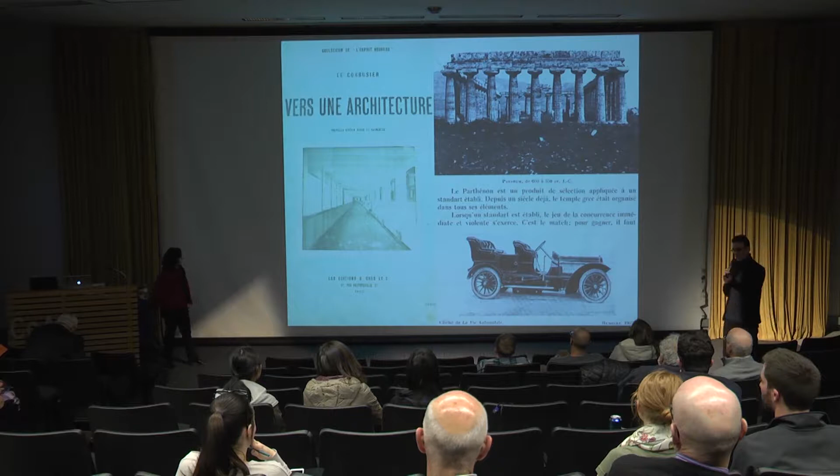Ideas that combine how history and contemporary issues can be connected, and how they can also be provocative for what's coming next. So not only ways of reading current developments, but also opening readings for different kinds of developments, or again, very profound ways of connecting ourselves to where we are. So how do we study architecture?

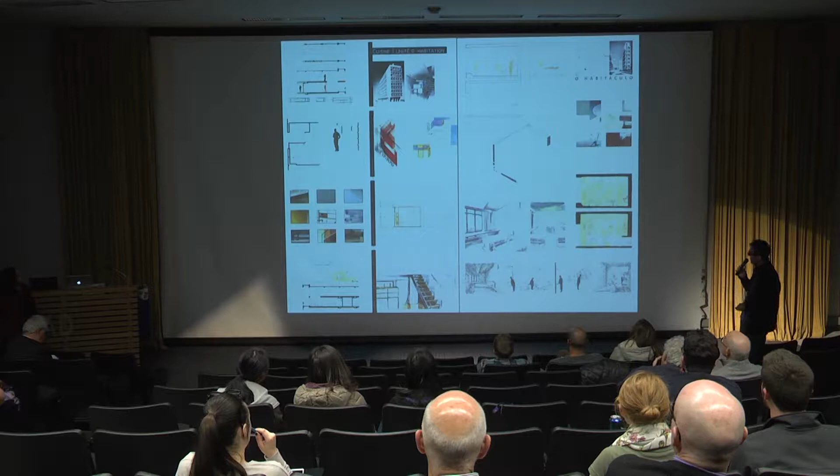But we also believe that architecture design cannot happen without research. So although I think there's too much light in these slides, this is a group of students looking at the kitchen at the Unité d'Habitation, and looking at the materials of the kitchen and how the kitchen is organized. And here is a group of students looking at the bedroom in the sanatorium by Aalto, and details like the height of that window that allows someone lying down in bed to look out towards the view.

So this idea that we have so much to learn from each other, that architecture is like a big family, and by researching someone else's work, we may have better shots at being more creative and more inventive. But I also know that the design process is never linear, and is something that we also have to reconcile with many different forces and almost unknown and open pathways. So we're also interested in taking our work in as open ways as possible.

So these are examples of one of the things that I, as a director of the school, am trying to push, which is students' record of their work through a portfolio where they are mapping the artists' or architects' work with their sketchbooks. And these are things they're looking at. This is from a comic book. As they are developing their projects, looking also at sculpture, and there's a notebook page with a bit of poetry as well. So this idea that, although we have a very precise disciplinary body, it's not an enclosed disciplinary way of working.

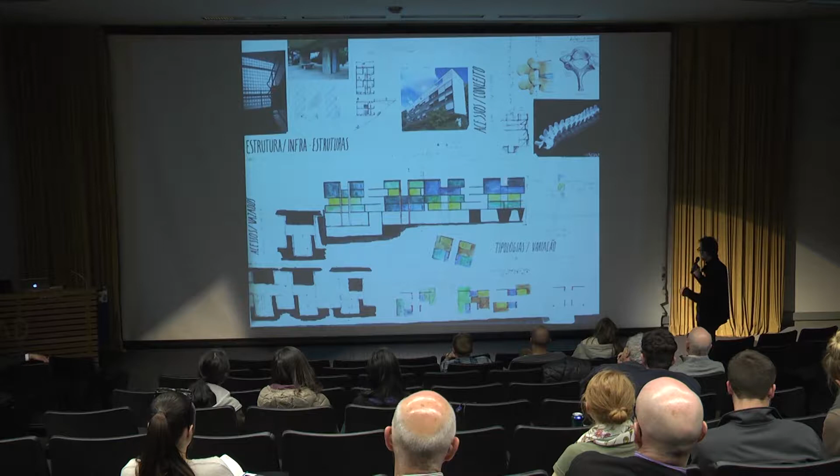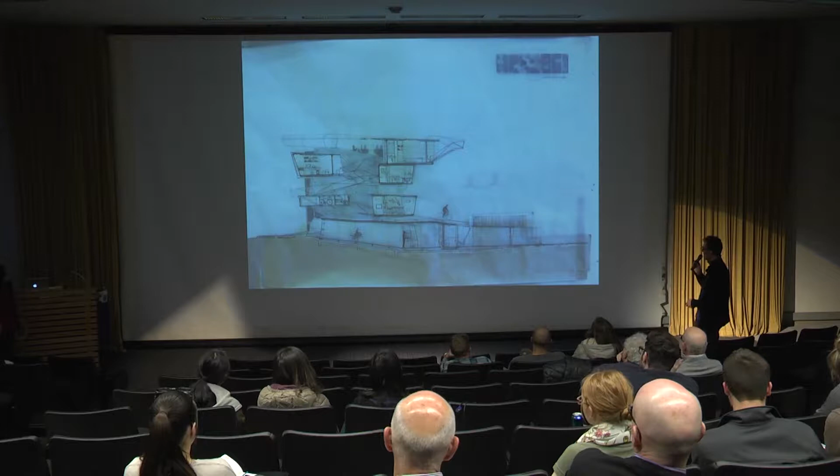And looking at structure, looking at bones, and understanding the different rhythms, and how in between every single disc there are soft tissues, elements that link us to how we experience certain programs in space. How do we study our bodies? I mean, the way the body inhabits space is almost the first fundamental thing we have to learn from. So these are examples of first-year students where we're trying to understand how buildings are not only organized, but how they are inhabited.

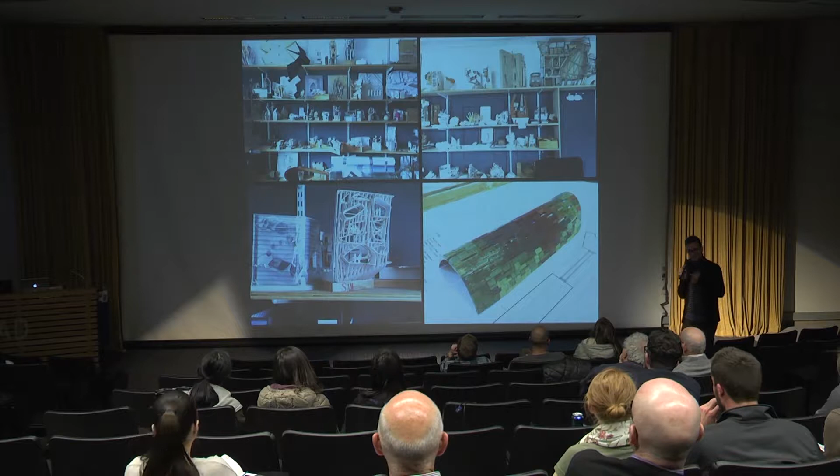Buildings are part of our everyday lives. And what we do is also achieved or searched through a series of continuous errors. And by having this mode of work where we learn from our mistakes, we're trying to make mistakes again and again, which is one of the important ways for us to salvage work.

So Christina will continue. Can you hear me, or do I need the other microphone? Can you hear me? Okay. Oh, you've been recording, so you can hear from here.

Okay, so just to give you a little bit of understanding of where our office is.

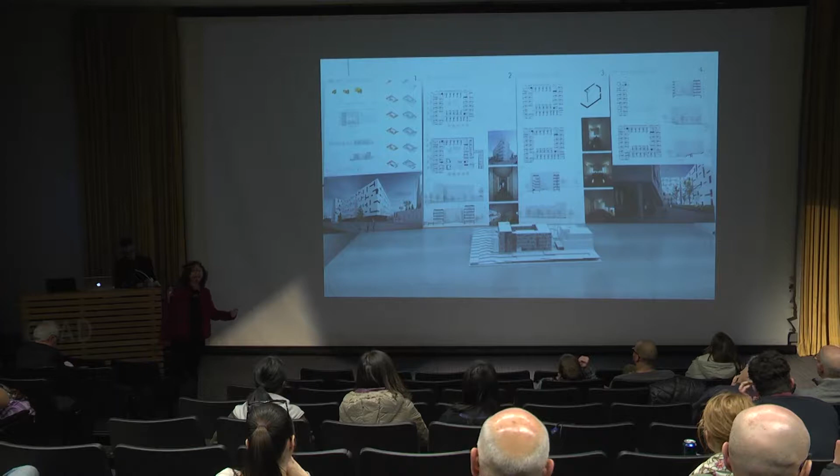And then we do a lot of competitions. As you know, in Europe, most of the buildings which are public buildings come through competition. So actually the buildings we're going to show you were, most of them, competitions that we won. But this is an example of how you submit your work to people that should not know your name. So in this case, we submitted 4 panels with images, diagrams, and a model. And this is how they selected our work, and we got a first award. So we're going to build this in the future.

Okay, so pass to Diogo now. Okay. Turn this on. It's on.

No, it's on now. So an interesting thing that we've also learned about architecture is that, almost as John Cage once mentioned, there are 10 rules for students and architects and professors. And the last comment he made about the 10th rule is to break all the rules. But one of the things we've mainly thought about is that in architecture, whenever there's a valid point of view, its opposite can be quite valid as well.

So this is a series of themes that we've found and then embedded in our work, but they are not aligned in any particular way. Those are things that either are bugging us, structuring us, messing us up. But those are just the way we've kind of written them. Those are things that we are always looking at.

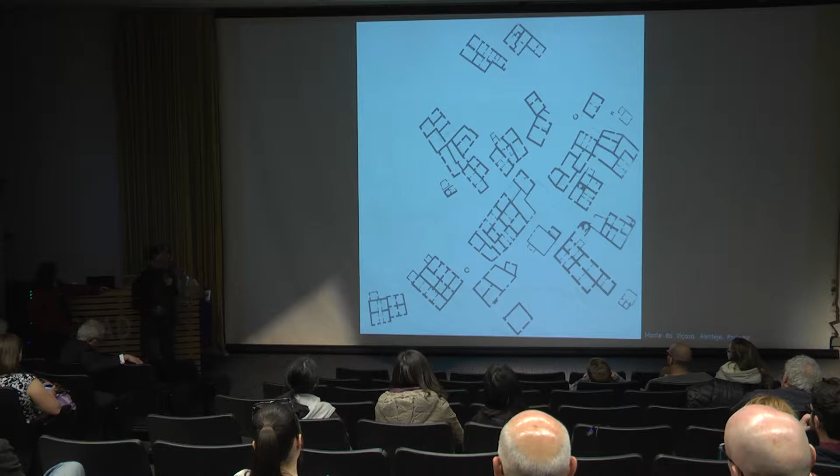And so this series of images just talks about how, from a diagrammatic point of view, we are interested in buildings that are opened up to the landscape. This is a little village in the middle of Portugal, and here what we can see is that the public spaces are, as the rooms are so small, the squares become living rooms in the city. So a square is a room for people to gather.

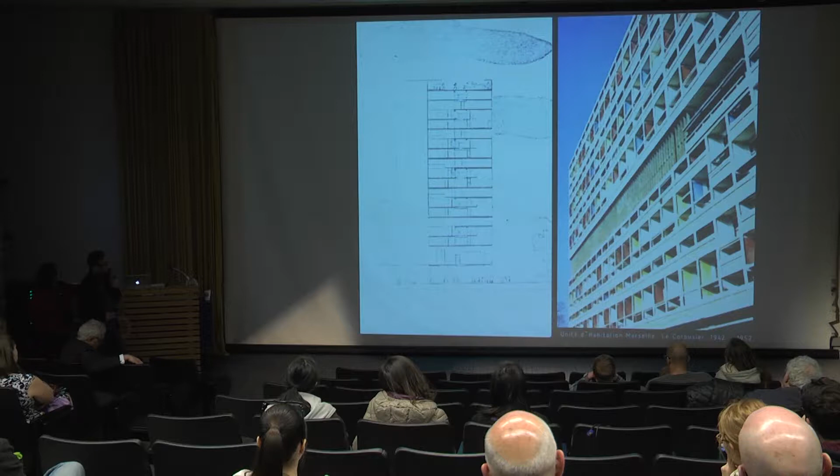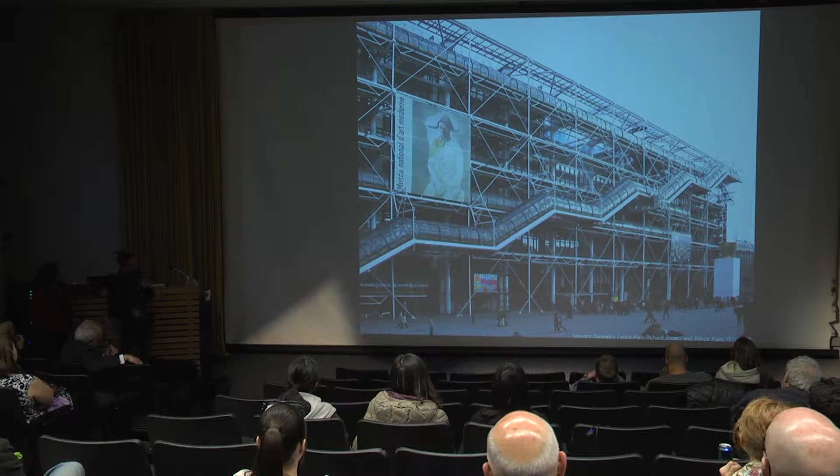But we're also interested in how we question the ground floor, how buildings establish a kind of ground condition, and how in this case there's this notion of the displacement of the ground condition by providing public space in different locations in a given building. And in this case, the fact that we circulate along the facade in front of the square here binds together the program, the circulation flow of people in the building, and it's the urbanity of this very strange building that was built in 1977.

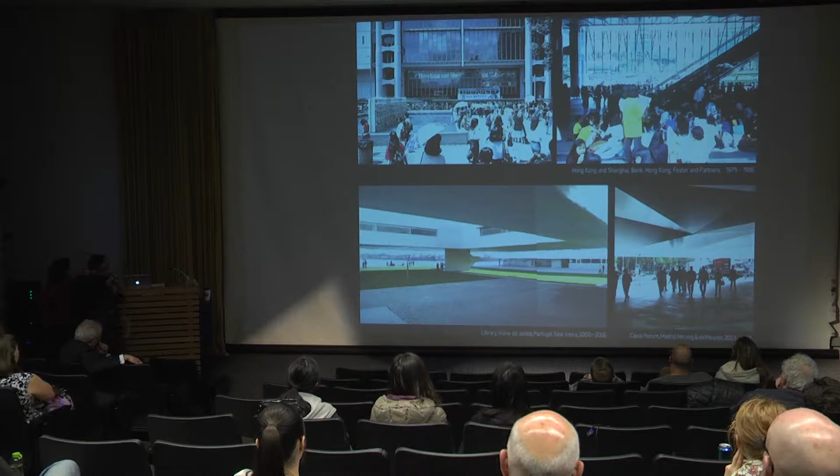So examples like how the ground is considered: here in the Hong Kong and Shanghai Bank Corporation's headquarters in Hong Kong, what's very interesting is there's almost no program on the ground floor, only the escalators. And knowing how expensive land is in Hong Kong, it's quite remarkable that this ground floor is occupiable by anyone at any time to do almost anything. And this is a Caixa Forum by Herzog & de Meuron, this is a library by Siza, but this idea of how the body flows from the city to the building is quite important in our work.

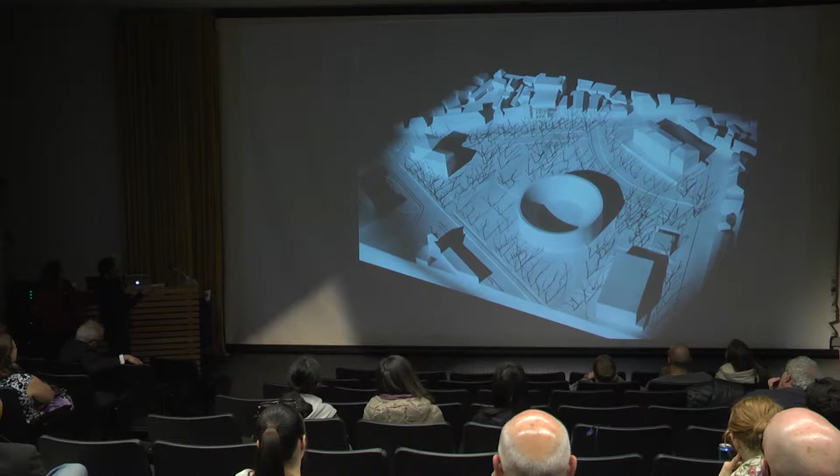So one of the key questions in this building immediately for us was, how do we provide for a building that is quite public, that is aligned in the street, that has quite small buildings, that is facing a very large public space. So there's a sense of dichotomy between the scale of the building, the scale of the program, the scale of its neighbors, and the scale of the space that is going to be signified by its program. That's the bullfight ring, the post office, the market, the town hall, and the court there.

Hasn't given up, has it?

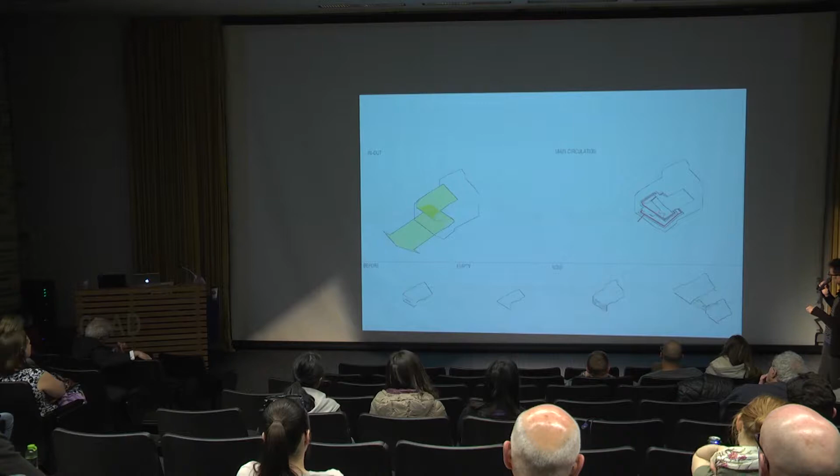The lot is very limited. It has, I have to say this in meters, 20 by 40. That's approximately 70 feet by 140 feet, and through these diagrams, you can't see much here, but one can see this idea of opening up the building towards the street and planning circulation along the facade. And I'm going to move to the program, the circulations.

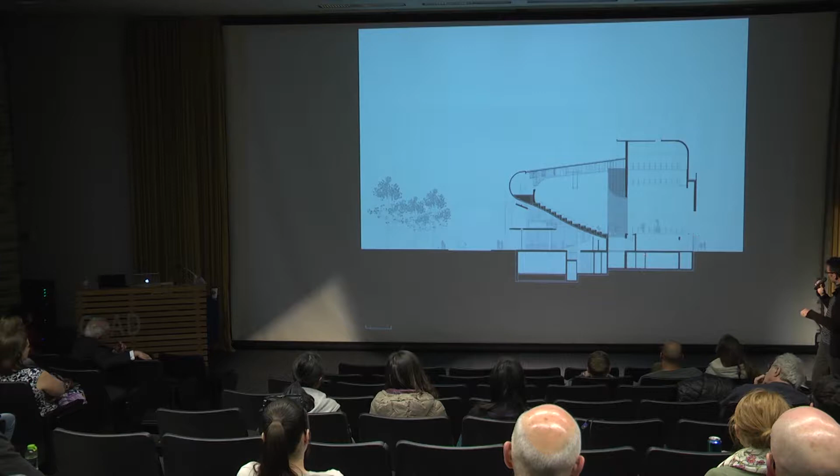And this is what I wanted to show you, which is how the street connects to the lobby, how the main auditorium is lifted up, the small auditorium at the bottom, the stage, the space on the stage. This is changing rooms. You can see that most of the height of the building is taken by the stage tower, and that's mainly what one can see in the plans now.

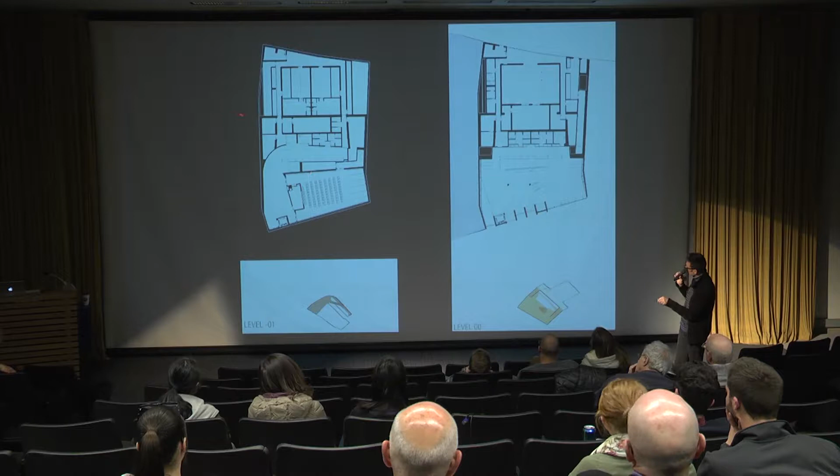So this is the ground floor. As you can see, it's as wide as possible, as deep as possible. Those are the stairs that take you to the upper level, to the main auditorium, and those are the stairs that take you down to the small auditorium. And you can see here, those are very big legs. I'll explain this in a minute.

From a structural point of view, the building is cantilevered from this point. So from this point, on the left-hand side, as you can see here, this is something like 70 feet cantilevered. This is maybe 80 feet cantilevered there. And so to do this, one can see how the structure is very much fixed at these two thick walls here, and with the help of those two guys over there.

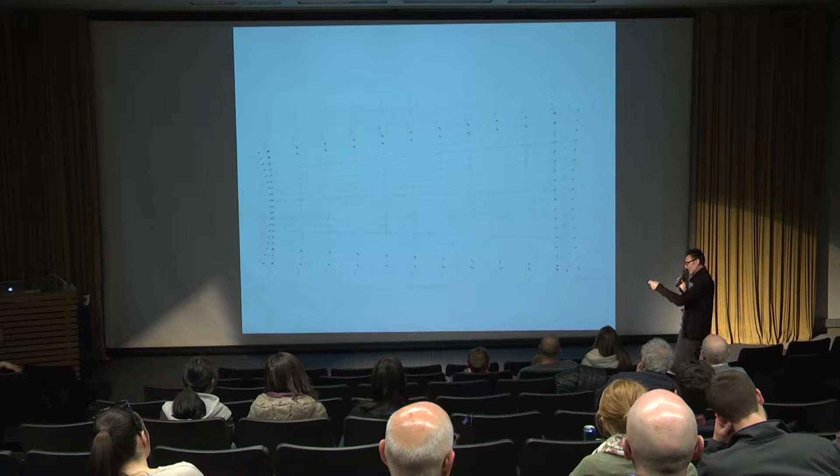And this is a drawing that maps all the circles. And this is not CATIA or anything. This is like AutoCAD 11, but we had to use those files and send them to the formwork fabricator that fabricated all the formwork through those files that had to be very precise in terms of its geometry. Because of the shape and the cantilever, the concrete is all self-compacting concrete, i.e. it's a very liquid concrete that doesn't need to be vibrated.

And what it means is that if there's any joint between any piece of formwork that is not completely sealed, water will go through, and if water goes through, there's sand concentration and less water concentration there, and it's a mess. So this was highly studied, welded together as one piece. This is 18 tons. I do not know how to translate 18,000 kilos into pounds, but it was heavy. A little bit.

And because it's pulled by a crane, there's this guy with a string. If he pulls a little bit, this thing will go like that. So it's like walking the dog. And this single piece of formwork had to be taken out as one single piece in one go. So this is one of these days on site that we'll find our spiritual guides and try to pray as much as possible.

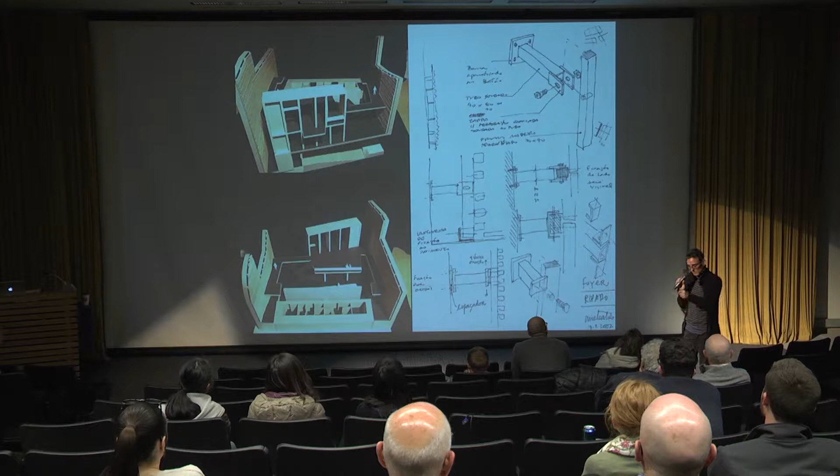And we were committed to do something that you and I could unbolt and get access to any duct if we needed to. So the idea here is that material will provide for this sense of continuity. So we had slate on the floors, concrete on the ceilings and on these walls here, and the pine wood on the lateral walls. So the public space was all done with natural materials.

And here I am about 12 feet under the ground floor. Those are people walking along the street. So by playing with voids in and out of the building, it also allows someone who's in the street to take a peek into the building, as the kids we just saw did.

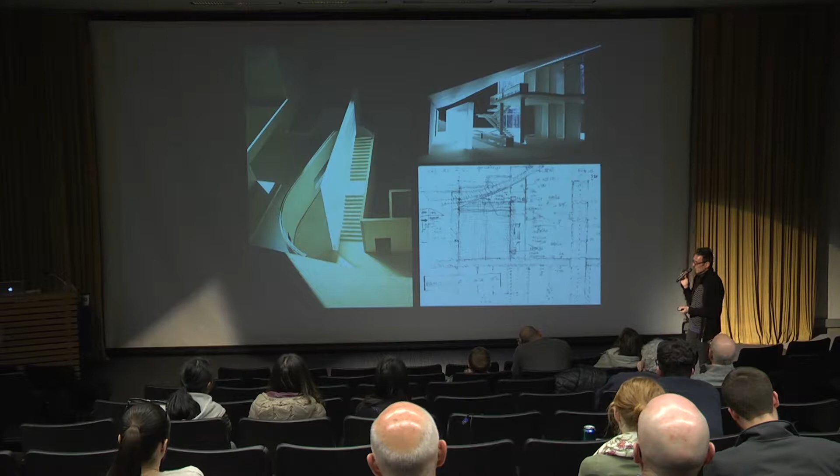As we didn't want to have any lighting here, a big question was how are we going to provide enough lighting in this space? So we provided this big light box that was tested. This is me a few years younger. Here is how we're testing how many lighting fixtures we need—cheap lighting fixtures, but how many would we need? Two, one? And here is three.

This testing happened even as we were designing, in the middle of our design, working with the electrical engineer. We had no idea how many lighting fixtures we were going to need. We were interested in continuous lighting, and we were lucky to have a glass manufacturer and an electrical fixture supplier who, after a series of meetings, were kind enough to provide a little experiment so we could learn what it takes to produce this. In public buildings, if these things aren't measured or specified, you're going to get into trouble later if the performance of the building doesn't comply with your client requirements.

So here you can see the introduction of color right at the moment where we move from the public space to the cloakroom, the cafeteria, or the restrooms.

At the back, all the walls of the stage are yellow, and the floor here is a cheap red rubber. Our intention was that even at the back of the stage, this big window could open the backstage to the street so people could walk by, and we could have images of the different shows occupying this wall over time. But it's also the entry to the lower stage—yes, the entry to the backstage, it's a service area.

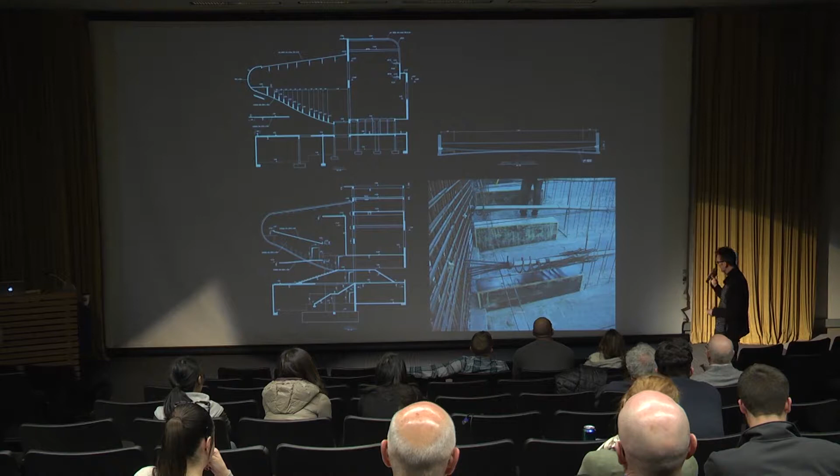And then when they got built, this is post-tension cables, as you can see here, and you can see those boxes—they seem to be built just with leftovers of formwork from other jobs. So it's interesting to see something that is apparently quite complicated but built in a kind of very clumsy way. And this is what we were aiming at.

You also can see that although the theater is quite classic in its shape, there's no threshold, there's no proscenium per se, although there's wing space at the stage, which is one of the most fundamental features in any theater, which is how we provide for privacy to performers.

And this is what moves us, how then the building is occupied, lived, enjoyed, and how the joy that we've had through the process comes alive in the way the building is being used.

So those are different shots of the stage, but also how creative people intervene with great audacity in the public areas of the building. So this is a fashion design show, performing in the staircases, participating in a poetry reading, photograph exhibitions, and a jazz festival.

And recently, the manager of the building, this is just an image being projected against the concrete wall, found out that the basement, the low ground floor, is very good for hard rock stuff. So apparently new heavy metal, loud music is being experimented in the lower ground floor.

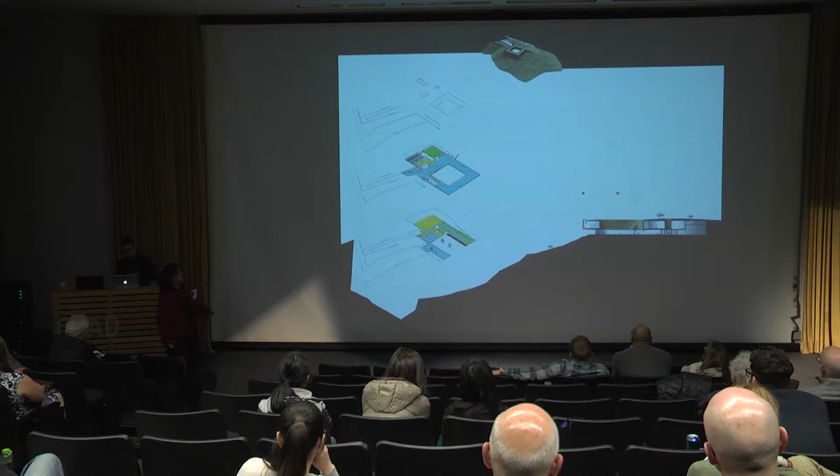And so the building is really coming from the earth, so it's part of the earth, and what it does is create a room, which is an outside room, a sort of cloister that in a way organized this museum that has this quality of framing the view.

So we were very interested in this huge landscape to select one point and just give a window to people to overlook, and at the same time to be protected from the winds and the warmth -- it's very hot in there, so we had this water feature running.

We had all this glass that connects one side of the museum to the other, and then this wall that embraces people and frames them into the view. So we create a public space, this public realm where people would like to be.

So that is the museum, and how does it fit within the landscape? In this case, of course, the walls are attached to the ground, but the building is like a wall floating above glass, so it has this metaphoric kind of intervention.

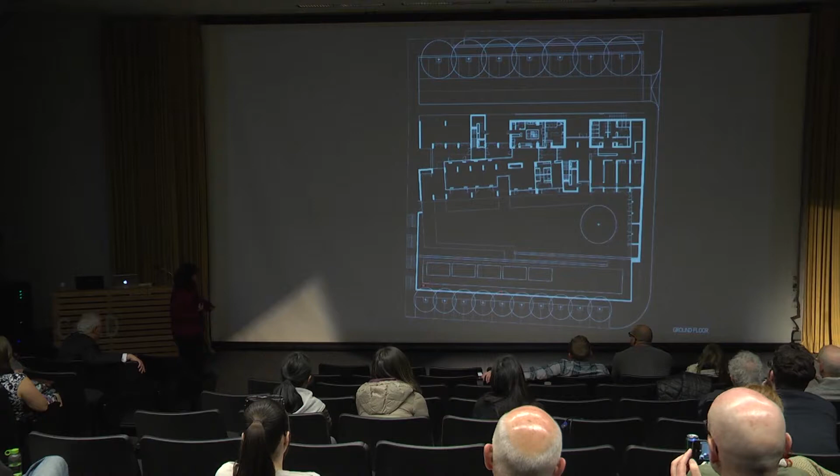So this is the garden, where they have a lot of events. The building creates an arcade so they have some shade when it's very hot, and you have transparent areas that connect the upper levels with the ground.

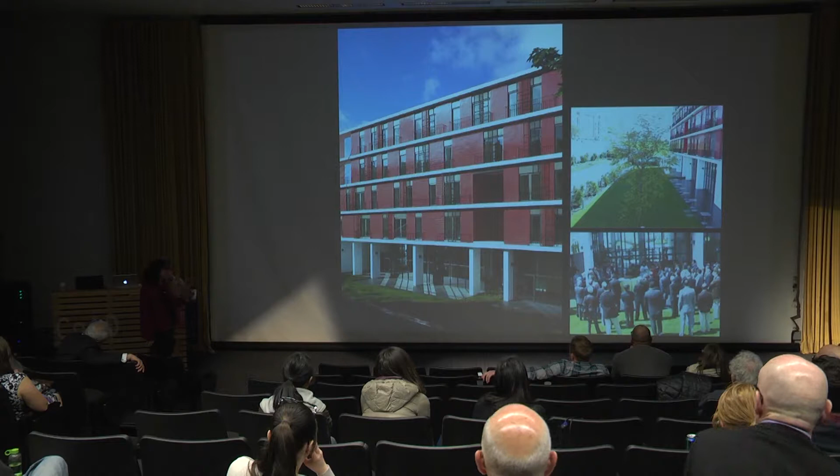For this building we selected tile, a material that is very commonly used in Portugal, but at the same time has almost zero maintenance because it lasts for a long time, especially under our climate conditions.

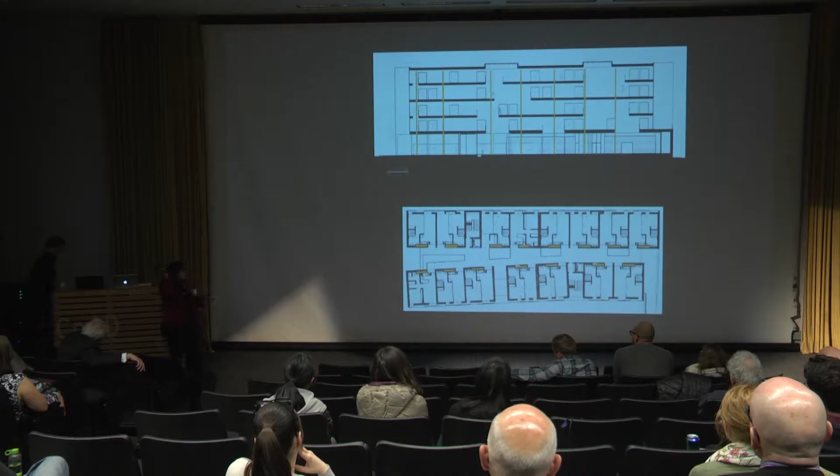So these are the vertical shafts that organize the infrastructures, and each floor is different. Because this is low-income housing, we only play a little with the corridors, but the infrastructures, which are the most expensive part, are always located in the same place.

This allowed the facade to be totally different, but at the same time it allows diversity, because these are older people, so they would recognize each floor as different from the others, helping them recognize their own floor.

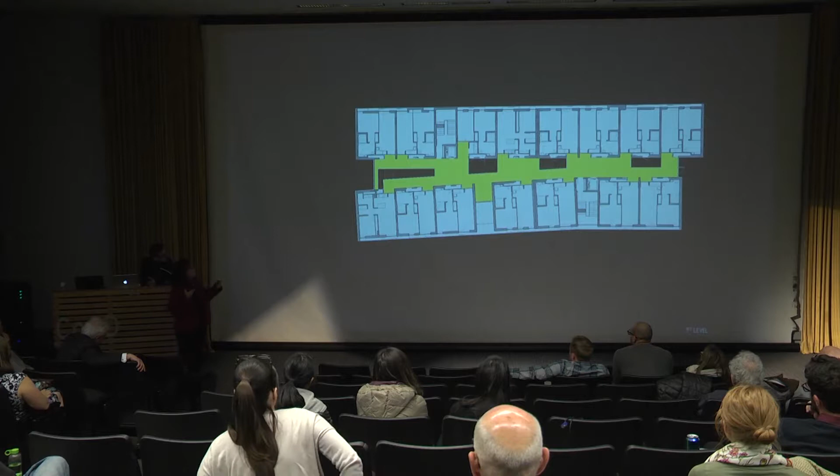This is an idea of one floor. The green space is the circulation area. It allows them to have pockets where they can talk to each other, and at the same time the voids connect all the floors, so they can be talking from different levels.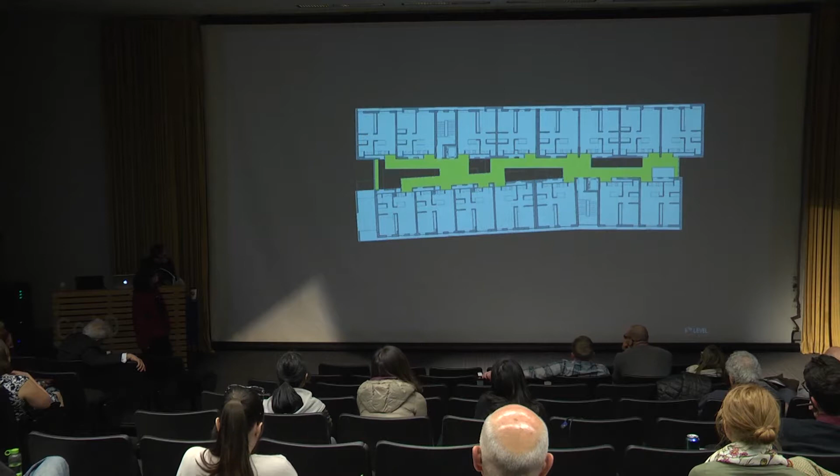If you frame on this unit, you can see how the door goes differently on each floor, and how the voids differ because of that. The infrastructures are kept constant, but everything flips from one floor to the other.

This is a section through that space showing the double heights that happen on each floor. We always wanted them to be talking at different levels, and these are what we call the winter gardens, where people with less mobility could overlook the garden and even talk to others.

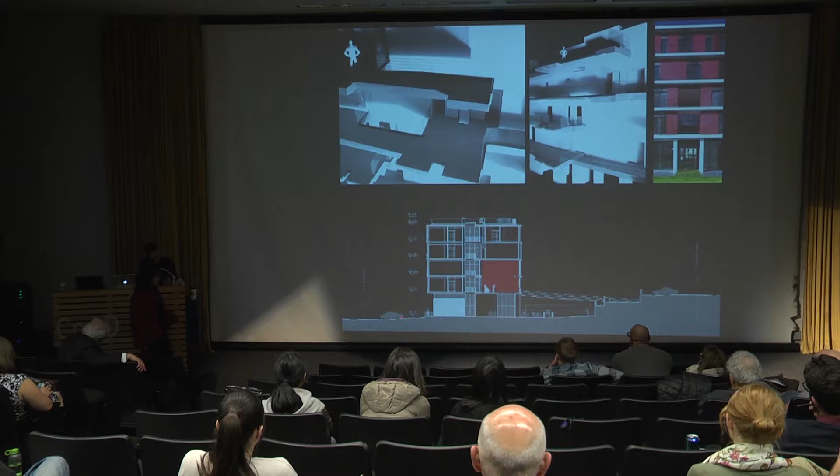This image shows the continued transparency engaging with the garden, organized on different levels. This sense of place is achieved using the topography, how the walls embrace the garden and connect it to different levels.

These are images of the units. On the ground floor we also used slate. This material is leftover from the quarries, which we bought in large quantities, and artisans came and assembled it. So what you see here, even though it's stone, is a very cheap material. Portugal doesn't have a lot of natural resources, so we have to use what is possible.

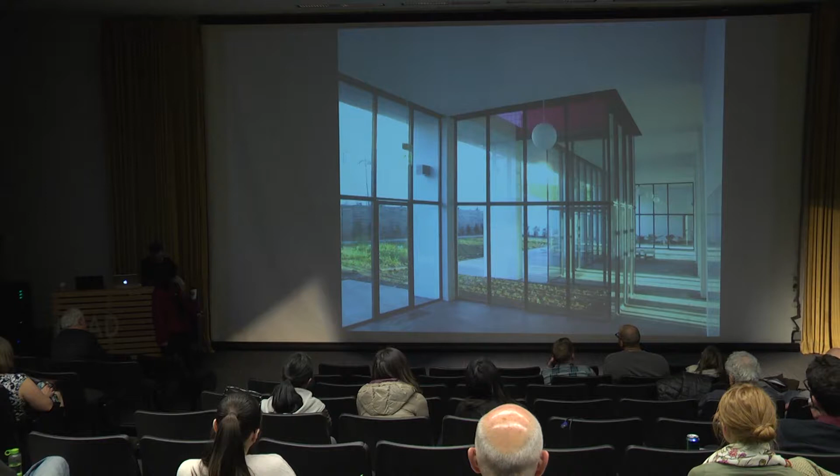And color became for us a material, because for us it is a cheap material. So we use a lot of color as a contrast between surfaces. The connection with the garden sometimes gets inside. This is the living room where they share. This is them. This picture doesn't show well, but this is the garden, so they are always connected there.

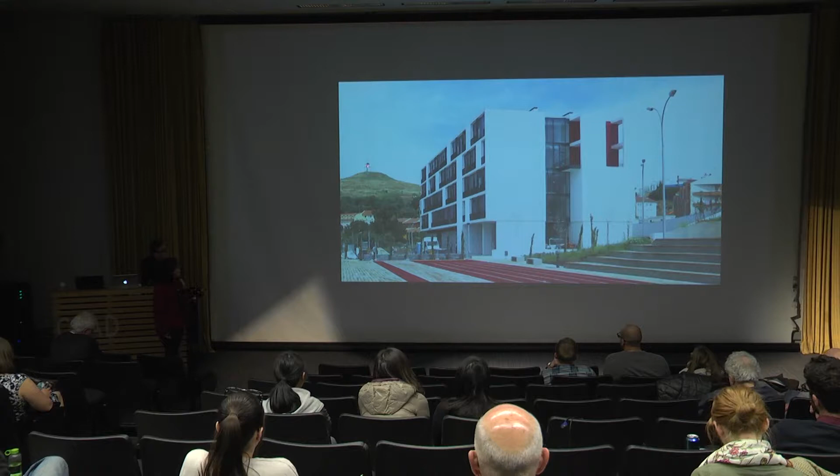And this is the view from the other facade, which is the main facade, where on this side we use the blue. So we also have the contrast between the very cold colors facing the warmer facades and the other side, which is the red. And in the middle are these circulation spaces, organized again with the site and this geodesic mark.

Another house: we decided to show you a house in the same place where our theater is. A client decided to give us this commission, and he had a plot really close to the theater, and he really enjoyed the theater, so he wanted us to design the house. Now, the reason why we wanted to show you this is because the topic is again public realm, but this community is a very small community, and they keep the doors open.

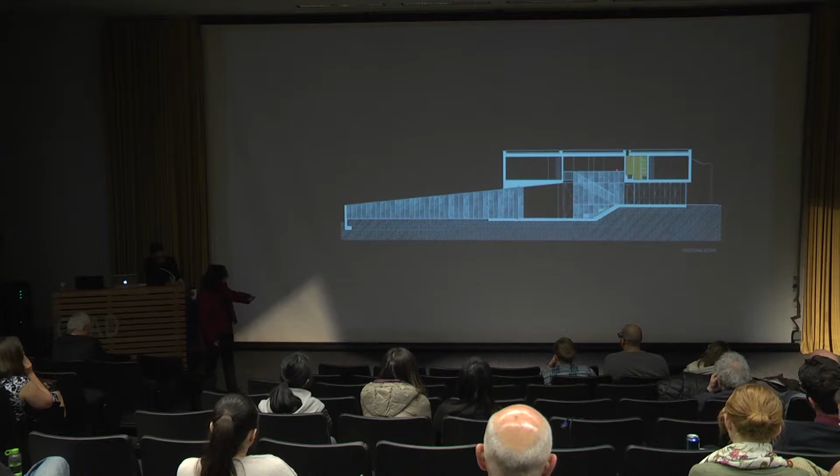So we were thinking about how a house can get privacy when the main door is totally open to the outside. So this is the street, and this is the main entrance, which they can keep open, but there is this connection with the garden. Again, we play with topography, and we have this very strong volume, which is heavier, attached to the ground, and then the private spaces of the house are like a box that floats on top of this heavier volume. This heavy volume interacts with the ground, so that's why we sculpted the ground in order to organize the levels. There is a staircase that brings people up and down.

And so what you see here again is that through the use of the slate, we organize one floor that has a courtyard. Now in this climate, the courtyard is essential because it filters the light. And in this case, because the topography is different, the courtyard also organizes different levels. And it gives you this sense of freshness that you need within the warm parts of the day.

Oh gosh, it doesn't show.

But this is a view from the entry, and where that person is, is the garden. So you create a connection through the garden, but the privacy is kept, because even if the door is open, you will not be seen, only when you're going up and down the staircase, but mainly the house is organized without being seen. So we like to show how people use the house. So this is how they use the house.

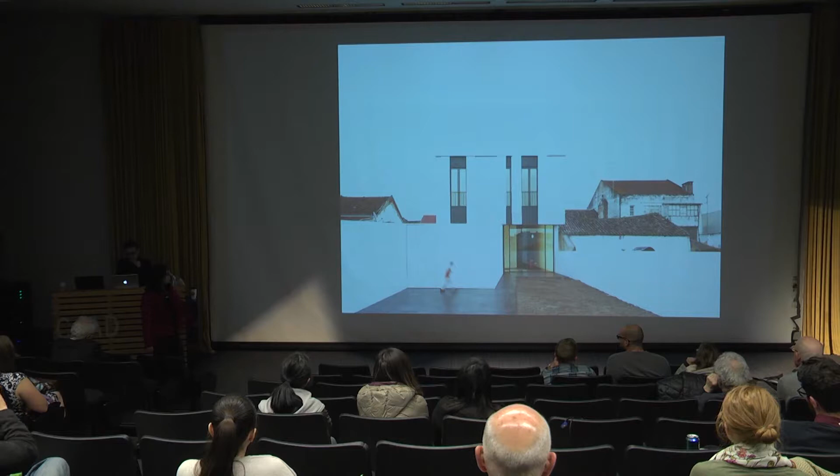There is a very big room at the back, which he calls the music room, because he loves music. So the house is a very peculiar one, because he has a music studio in his house. This is the garden, not yet; now it has more gardens and everything.

Okay, this is me? Okay.

Okay, so another interesting thing is how we select buildings that already exist, because it's not just building, it's how do you keep on having buildings that have been used forever, and how do you give them a new life? So in this case, this is a town in Alentejo where on a main square there was a monastery that was already a military headquarters, that was a hospital. So it's a building that has been through many stages, and the town is beautiful, with a castle, with these walls.

The town is mainly white with the red roofs. So we were interested in keeping these types of traditions and conditions. This town is very famous for its tapestry. And this is an event where the town is totally transformed, because they put all the tapestries on the windows and they celebrate the event. And our building is right on the main square, which is this building over here.

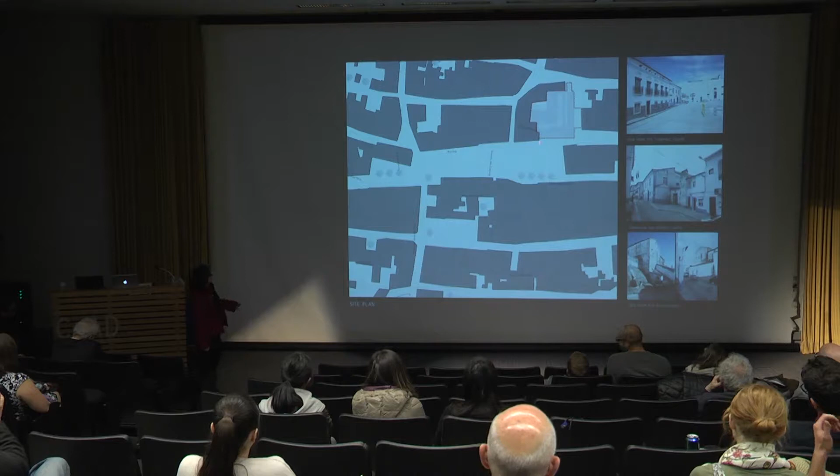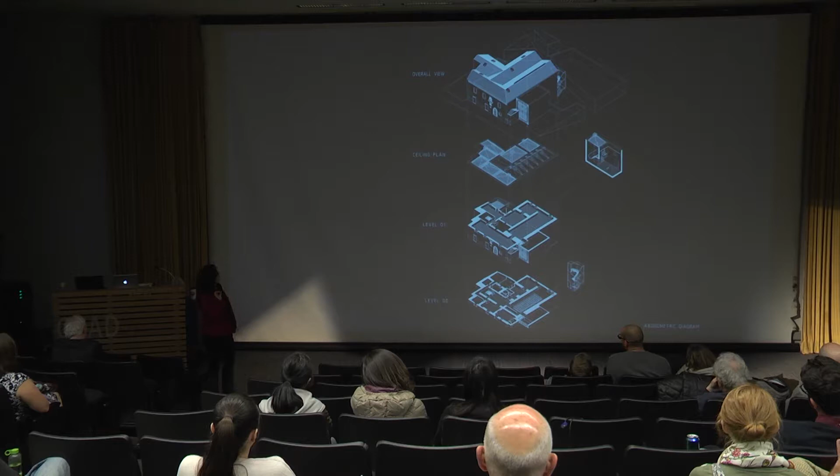So the building had a lot of uses, and what we decided was how we can engage in part of this building's life by touching very little. So in this case, turning it into a museum where people go in and celebrate their culture, we decided to organize one main area that became double height, where people get together.

The entry, this is the square entry. This was an old chapel that we kept, and this was used for many different things, but it was a large room, so we wanted to keep that as an exhibition room.

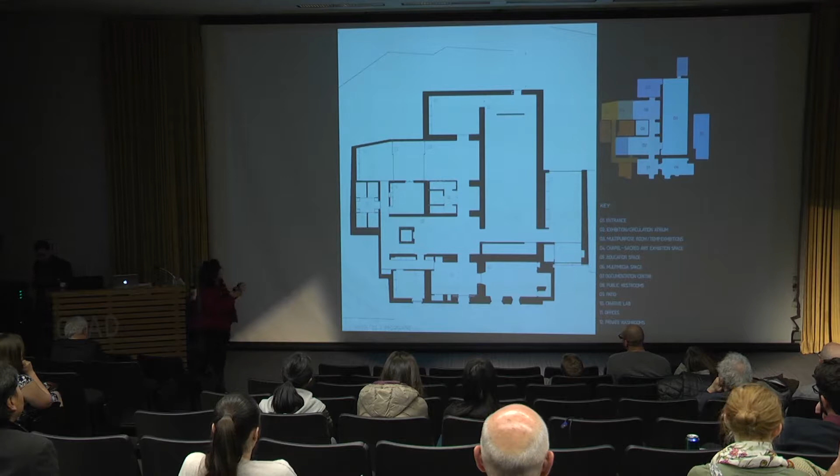We also create an extra part, so that is an extension of the building that before was just a courtyard, and this is our new intervention, let's say. So the building is organized through all these already existing walls that somehow we try to organize, especially because the levels were totally different. But we decided that our intervention would be creating on the ground floor this very heavy material, which is a local marble that will bring a new identity to the building.

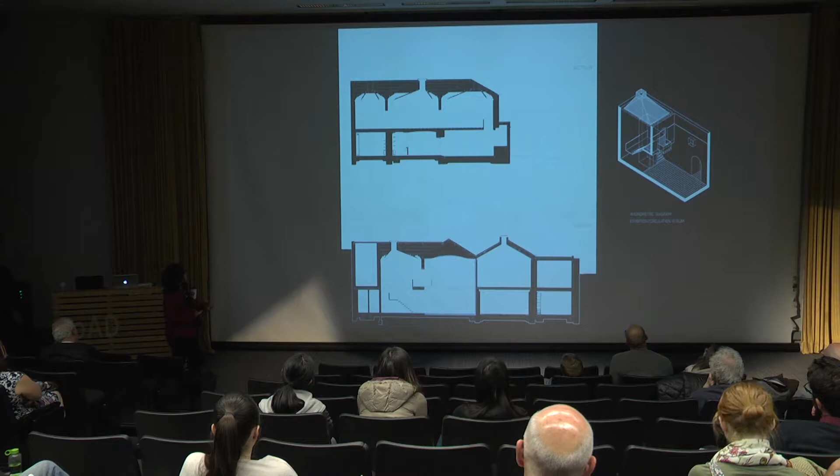Now, another feature which is important was the ceilings. So in the new life of the building, it was all about the floor with the marble, and then the ceilings that organize all these infrastructures, but at the same time create a lot of skylights that allow the building, again, to have a lot of flexibility. When you don't want to use them, they will be closed to protect the artifacts, but if there is an event, you would open them and allow people to stay longer, such as these women that stayed there the full day, and because we added these skylights, they managed to work there the full day with natural light. So again, how do we allow the space to be more flexible?

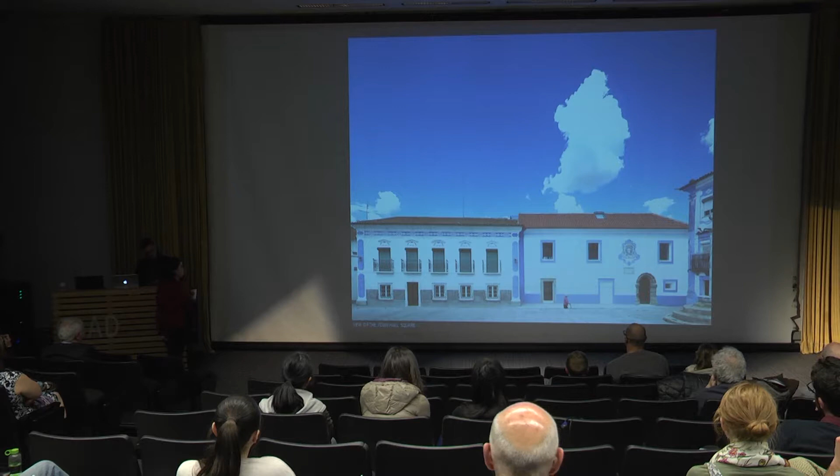This window overlooking the castle is a balcony that we open, and we allow people to go closer. The building was kept with our consultants in terms of color. We reached the original color of the building. And this is our intervention where, of course, we use the patterns of the tapestry with a CNC cutting machine.

Okay, this is me or you? Okay, me.

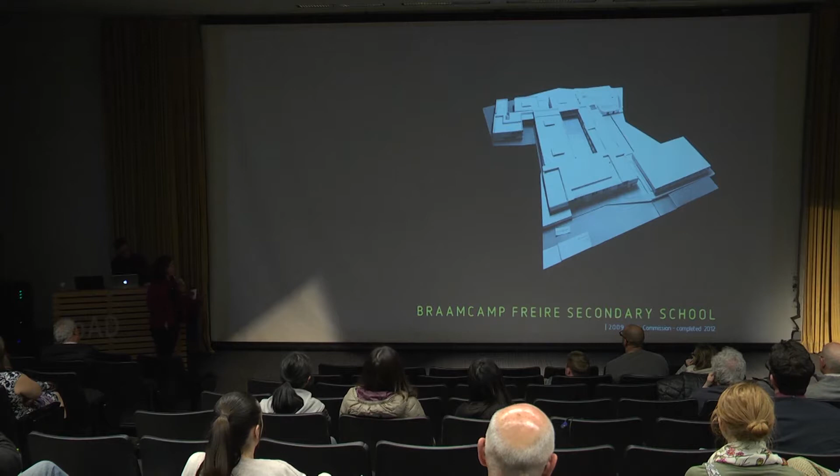Okay, so this is the school. This is the school that we finished from another competition commission, and to start this, we were very interested in what it is about designing a school. What are the things that children could be interested in? So we did a lot of research into these mathematical toys with geometry that Friedrich Froebel developed, which we know a lot of architects were sensitive to. And we understand that children are sensitive to proportions. So it took us a long time to organize.

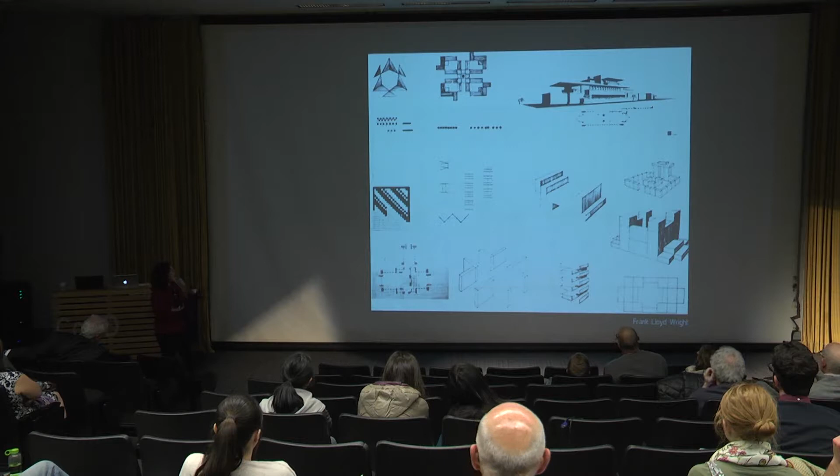These are architects that even say, like Frank Lloyd Wright, I played with these toys and they changed my life. I became an architect through these mathematical toys. So we looked at this and we realized that maybe this idea of playground could be interesting. So it took us a long time to organize what is a classroom, what is a good classroom. So they gave us this chance to do a school where there were already pre-existing buildings.

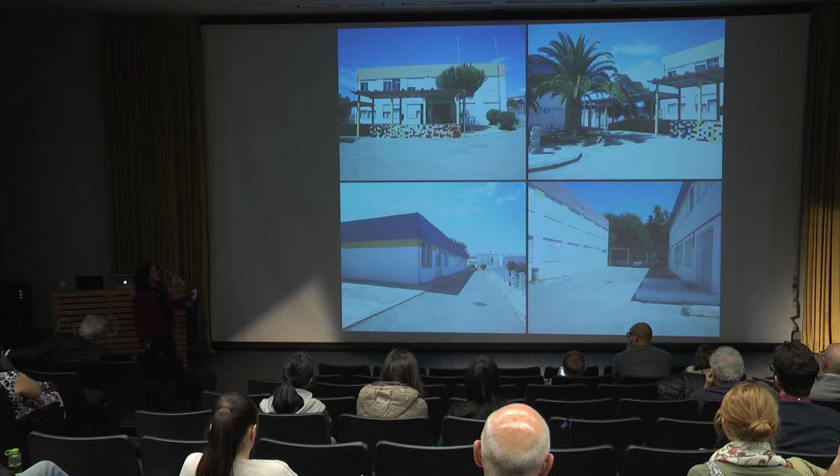So the school was organized into separated buildings, and through the paths they would go from one building to the other. Now, in terms of conditions, this was not in a very good state in terms of structure, but at the same time the children would get totally wet, and in wintertime it was very tough for them to stay outdoors because there were no indoor spaces for them to gather.

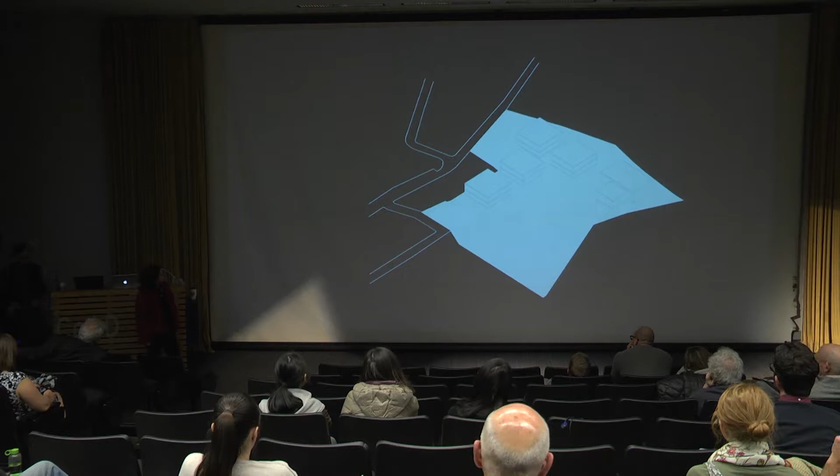So the idea of the school: first of all, this blue part is our site, and these were the existing buildings. So we decided to remove some of the buildings, and others we kept, and we organized the new program, which was twice or three times as big as the original one, but this time we decided to create one building that could embrace the existing ones, connecting all of them, and turn them into one single building.

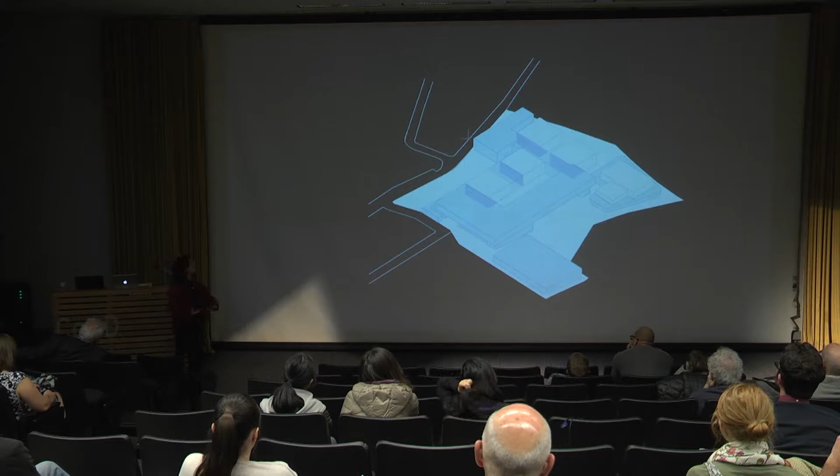In the middle, we create a square. And the square, we call it the learning square, is where all the students gather. So the school is part of a matrix that organizes all the site, and it creates areas where the buildings engage with the landscape, because there is a moment where there was a retaining wall. And so the existing buildings mold the landscape a little bit and create pockets where the children can be, and connect the old with the new.

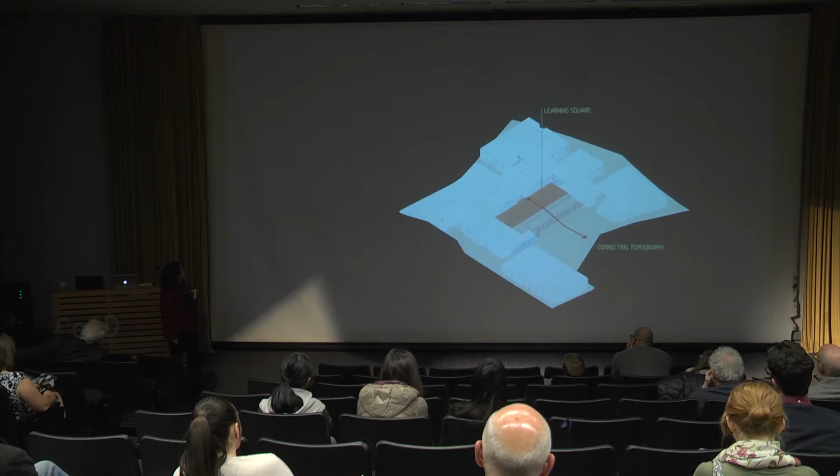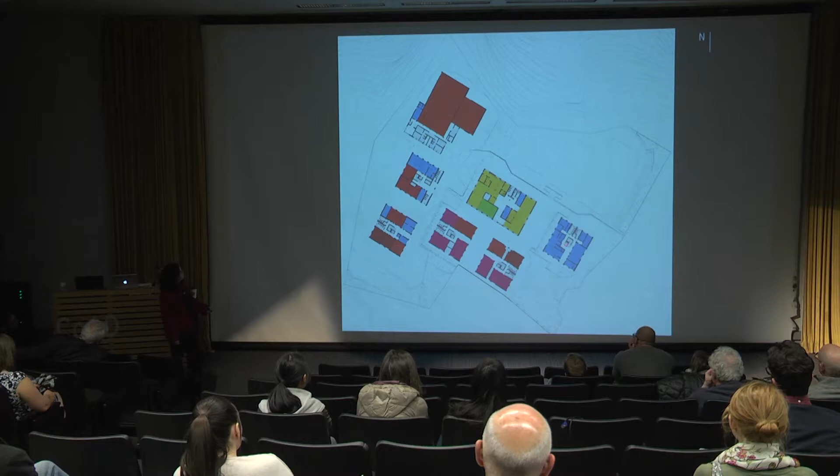So the learning square, the learning street, I'm going to show you after. And so this is where the learning square is, the circulations around that area, the connection with the landscape and the topography. And the buildings initially were totally separated, and this is how we start to connect them.

So in terms of this, this section is not very good. But anyway, this is a section through there. And what you see is the old buildings start to merge into the new building, and they create spaces. The other ones are a very regular grid, but then there are spaces that are twisted, they have a different shape, and those are the spaces that, in terms of sections, create unusual spaces where they gather.

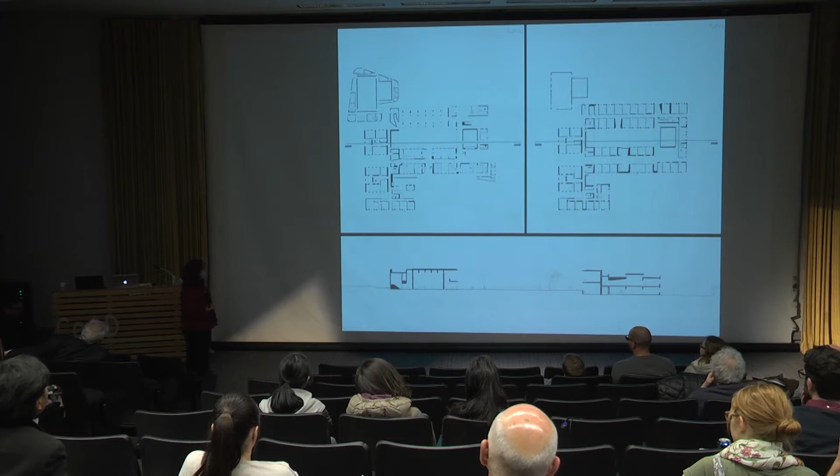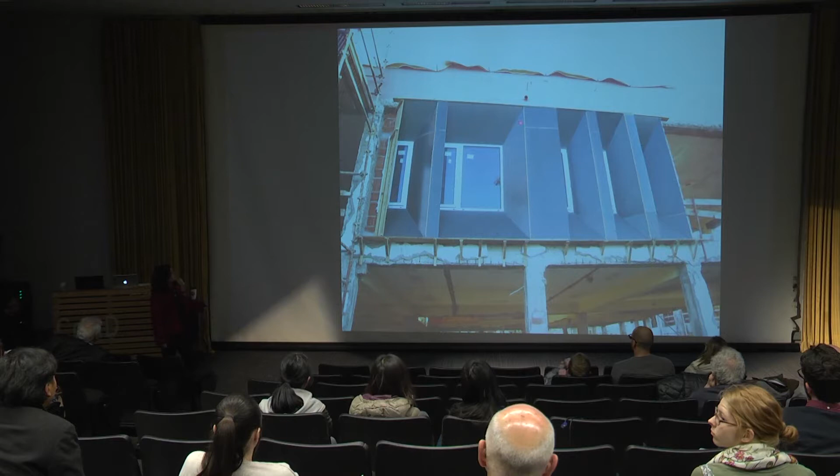So we're going through every floor and explaining to you the connection with the buildings. This is the existing buildings. And these are the facades. Now, in terms of facades, we create a mold that was a prefabricated concrete. And the way we designed it allows the light to be shaded, to be protected.

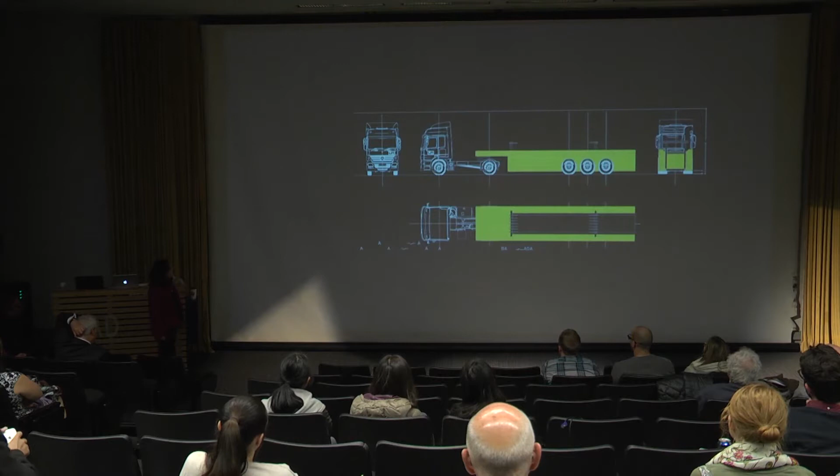Again, we use the color as an indirect light, so the students don't see the color, but they can see the color reflected. And this is how we studied the prefabricated panels so that they could fit into the transport that brings them from the factory to the site. These are some examples, and how they are assembled.

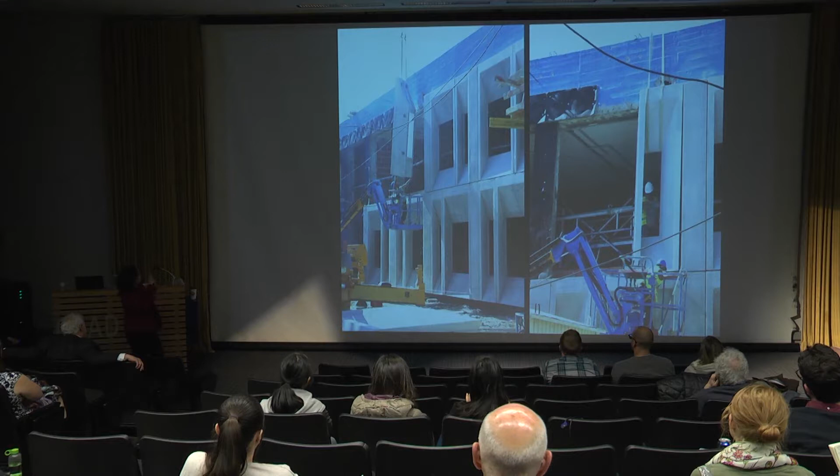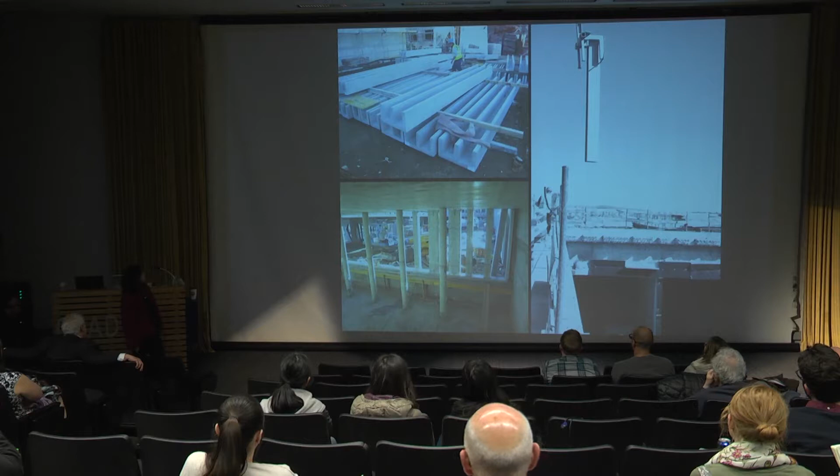So these panels are just 7 different panels, and they all assemble in different rhythms, allowing the classrooms to have natural light, but at the same time, the sun-protected light that it requires. This is the main square, which is a construction site at this moment in the picture. These are other prefabricated panels. This exists in the factory as a drainage gutter, and so we use them as a facade element.

These are examples to remind us that a simple glass needs 7 men to put it together. So we were very concerned about the weight of things, where we had to use the cranes and not. So you see the color applied, and you can have situations where you don't see color. This is what we call the main square, and the other side has a lot of color.

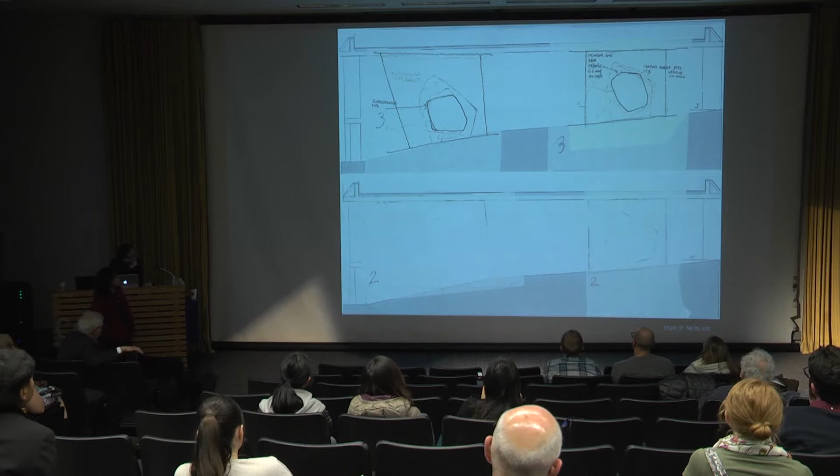So this is the connection with the landscape, and we had a portico. So the building is lifted from the ground, and it has the portico. So here is the indirect color that you don't see, but of course is reflected. And this is the arcade that we saw already in some of the images. So these are the studies for that arcade. We always wanted them to be a playground, so we studied them in order for the children to be able to see it.

So this is under construction with concrete. The shapes are getting there. So this is already one example when it's built, and this is the one that is facing the sports area where they play sports, and that is what we call a square. And this is them engaging.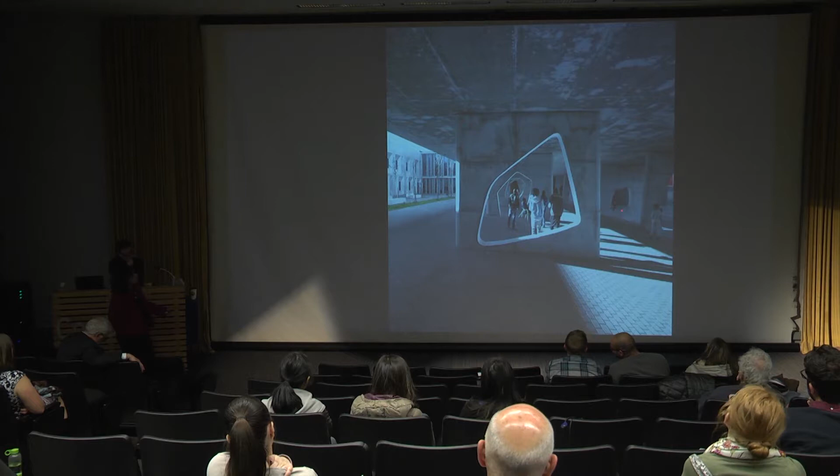This is the first day of the school opening. We didn't say anything, and they started to use this area as a gathering area. These spaces are very comfortable. Some of them you can walk through, some other ones you sit. So it's a very lovely space to be.

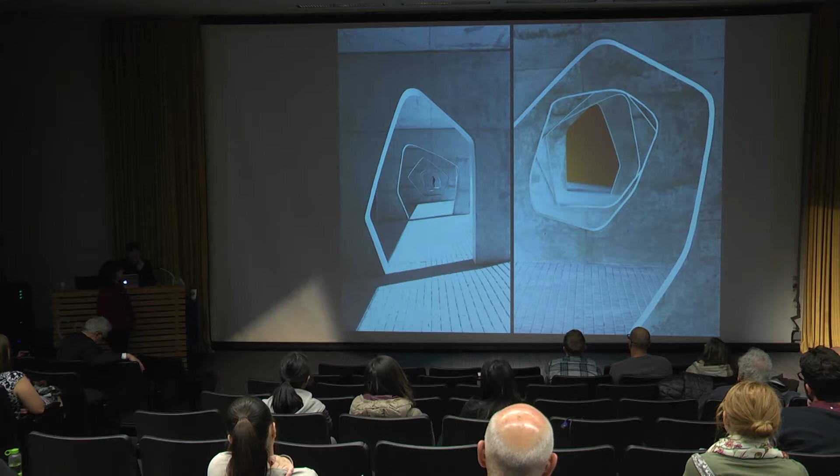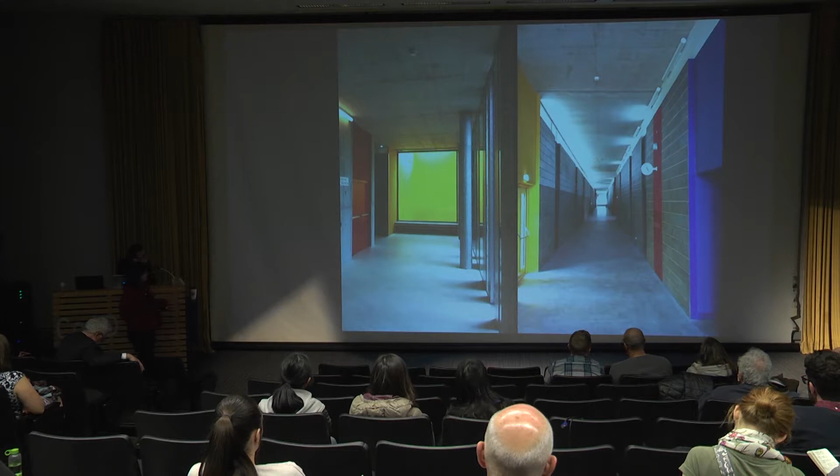And again, the color, we use it as a material. And so these are the circulation areas, which we embrace with a lot of color. Those are the regular spaces that I told you about. Some of them have light from above. Some others create a corridor that allows you to understand where your classroom is, in a different color.

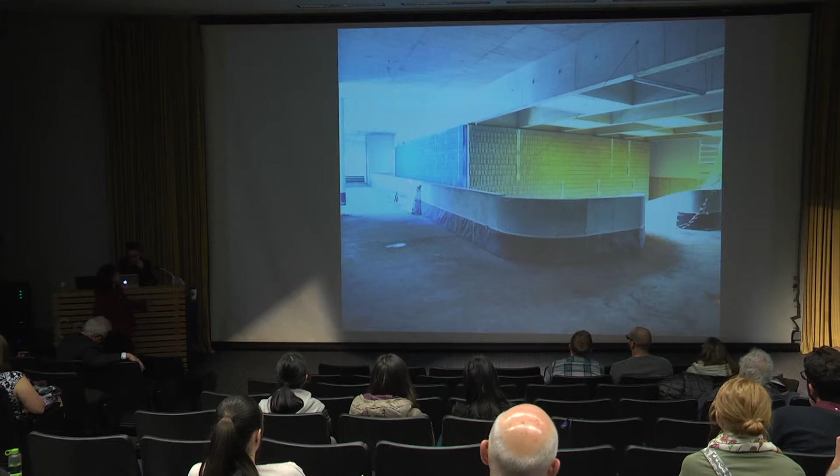Okay. So this is the main entry, and we have the use of color in this. This is a multi-purpose hall, where we designed this curved staircase, all designed in concrete, and these are studies for that staircase that we wanted to be a singular element within the school. This is the staircase getting built.

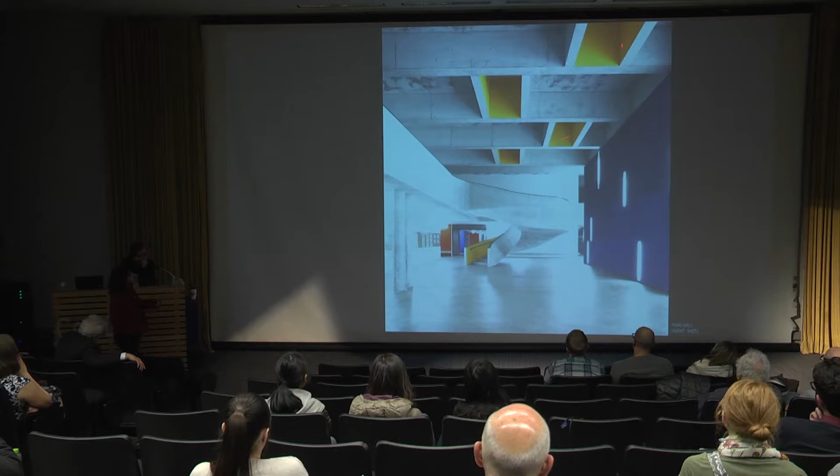And this is the space. So the staircase connects levels, and that is the multi-purpose hall. And these are the skylights that cast light at different times of the day, where you have the yellow that brings light to the space. The students use it a lot. This is the interior of that auditorium. And this is a classroom.

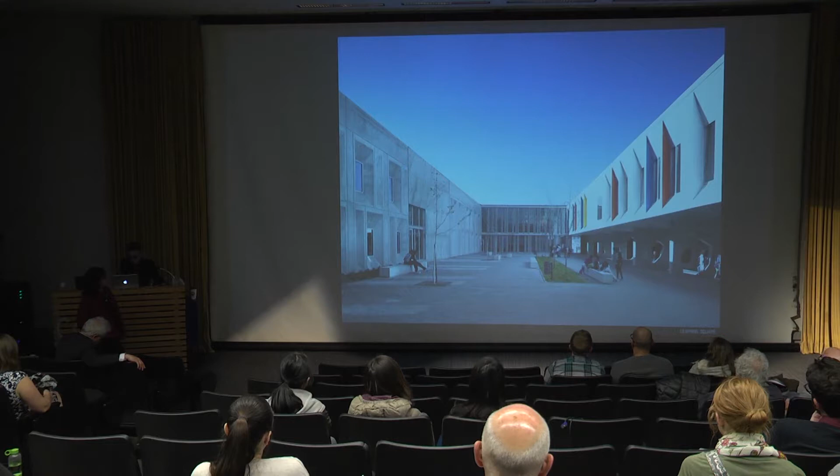This is a laboratory that is very, very serene, and here you find an acoustic ceiling, but the color is very calm, so that the students have a very nice environment. And so this is the main square where they spend their time. This is our last design, and Diogo is going to show.

Oh, you don't need, oh, you do. Okay. All right.

So this is a competition we won in 2008, and we're still revising the project. And so it's been only 7 years now. The buildings last forever, let's say. We've studied buildings that are meant to last. And the opportunity that we have to engage with clients and to discuss how programs may shape the future of a community is quite important.

So this is a medical school, and one of the reasons that this is taking so much time is a simple shift at the presidential, managerial level at the Faculty of Medicine. So with a new provost, a new dean, the way the program was conceived changed radically.

But the building has about 140,000 square feet, so it's a very large building, and it's a very compact building. It's in Coimbra. Coimbra is one of the eldest cities in Portugal. It's also one of the eldest universities in Europe. The University of Coimbra was founded around the 1200s, and it's 120 miles north of Lisbon.

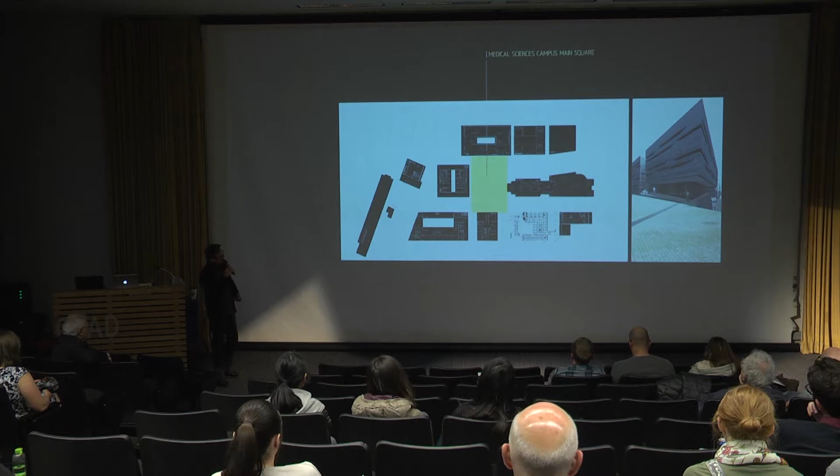The building has this interesting corner relationship with the main campus square, but also from a programmatic point of view, the building is a hybrid. It has dentistry, psychology, auditoriums, research labs, and so the building has about 8 different departments under one single roof. So you can imagine 8 different departments, one dean, 8 different heads.

It's been quite fun to work with all these people and to learn so much about not only their current needs, but also how they project themselves towards the future. Because imagine we won this competition in 2008, it was launched in 2007. We are still debating how present and future can be brought together.

So a key feature for us, connecting this program to how people enjoy buildings and how people move, was that the only way we can connect a very compact building is by organizing the voids, kind of the non-programmatic areas of the building. So what we have here is the labs, the most public areas, and the big auditoriums. And here you can see this section and how we kind of extrapolated a void that would bind the whole program together.

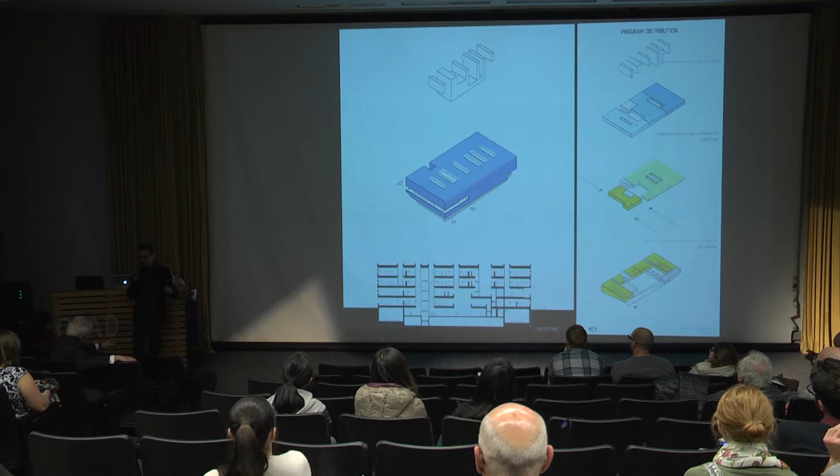This may sound great and is a good apparatus for connectivity, but in terms of fire safety and acoustic performance it is a nightmare. And we're looking at a lot of surfaces, guess what, with exposed concrete. It's a kind of material that we're very, very keen on working with. And so that's also another interesting challenge. So how do we communicate, but how do we allow for privacy and sound not to travel that much?

So what we have here is how this series of different voids have different depths and heights, and how through some of the treatment of the glass we can allow the sound produced in the lobby for the main auditoriums to travel mainly to the most public space, as this is open, and not to the lab space because there's this glass here.

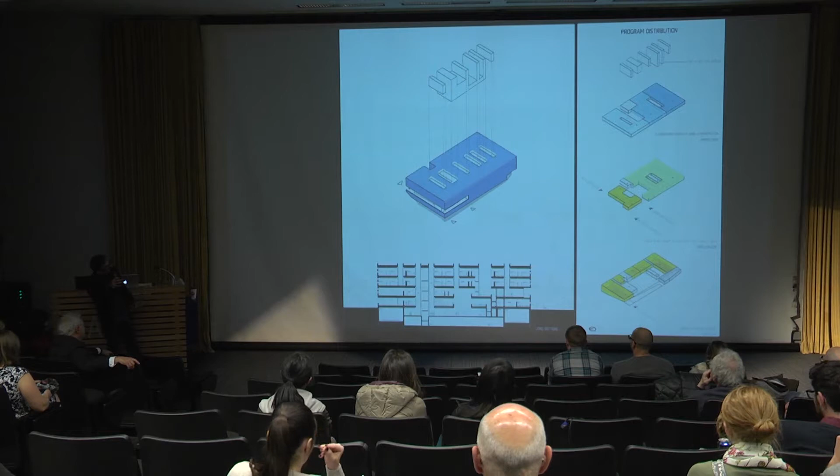And if they are given a space where they can gather, so this is a reading area, cafeteria, there's a little esplanade here, which is there because there's nice woods and nice trees on the other side. This was for us quite a more transparent area and more interesting to work with. So this is the entrance there, that's the main square.

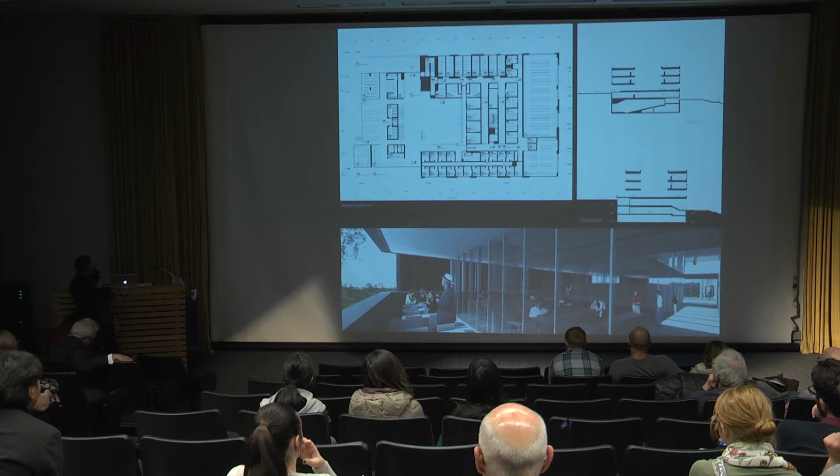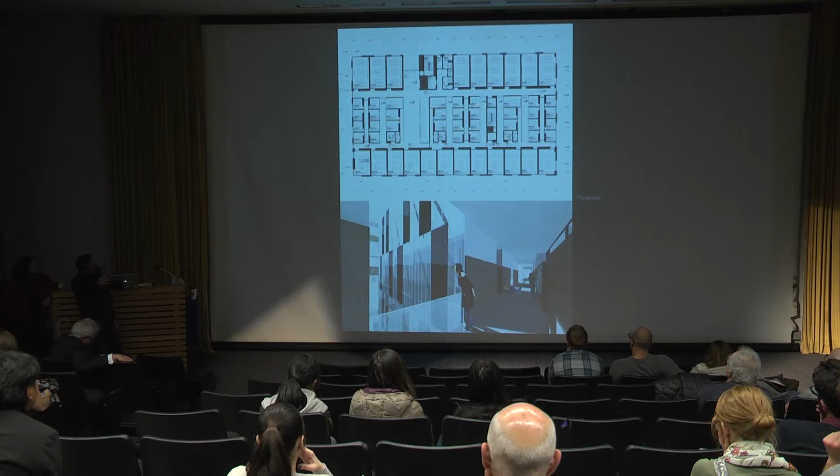We'll walk through to the cafe and to the esplanade to enjoy a little bit of the landscape, the outskirts of this town. And as you can see on the upper floors, how relentless the program is. So, for instance, we also decided to locate all the faculty offices in those voids and all the research labs where students are working with adequate exposure. And this is the biggest void that connects the two auditoriums.

One of the things we learned from the medical profession and the medical sciences, all kinds of conferences are also a great opportunity for manufacturers and labs to connect with professors. So those two auditoriums that you see there are 2 400-people auditoriums. Then we have another 2 here. This one is 150 people. Then we have 275. They are also conceiving this building as a great hub for all these kinds of events that also bring a lot of revenue to the university. So the university is looking at renting this place as well.

So one has to deal with all these issues as one is programming this building, and that's why this space is so big but also so tall. So one of the things we were wondering about is that it would be great whenever there's an event that the hub of the event travels a little bit. So here I am in my lab circulation, which is a corridor somewhere here on the 2nd floor, and I'm looking down, and I'm looking at people and an event that is taking place.